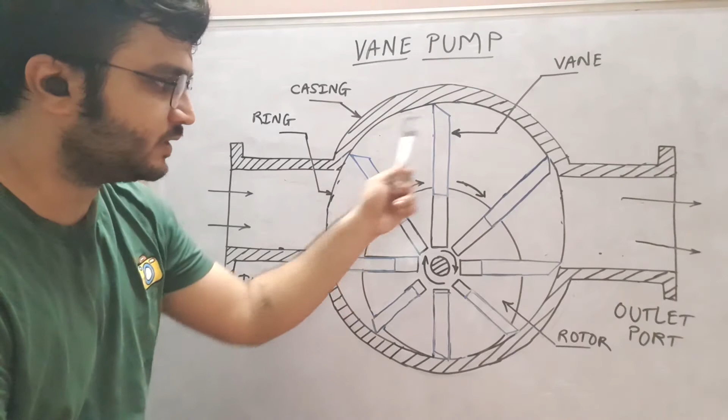A vane pump basically comprises a rotor mounted over a shaft coupled with the electric motor. This rotor carries a series of vanes in slots arranged radially around its periphery. These vanes make firm contact with a ring mounted inside the casing, and this ring matches exactly with the inner periphery of the casing.

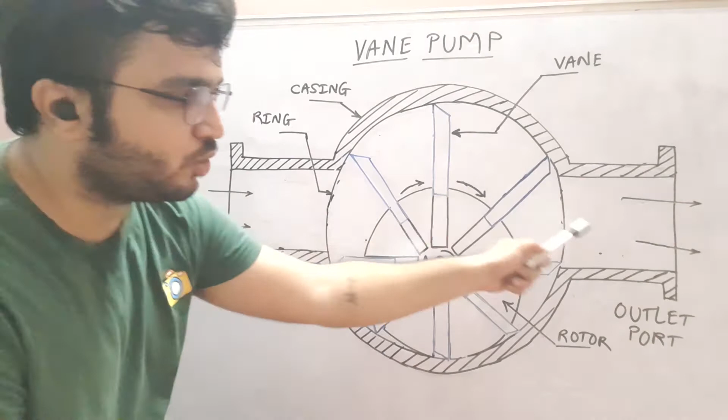This casing has an inlet port and an outlet port. From the inlet port, hydraulic oil enters during the suction stroke, and from the outlet port, high pressure hydraulic oil leaves the pump and is delivered to the required application area.

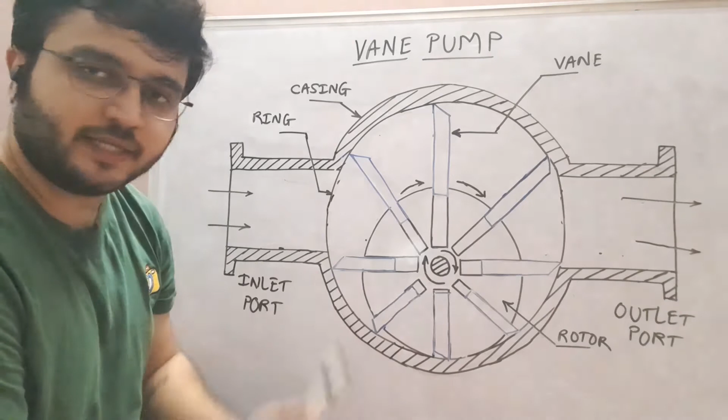Now let us see how this vane pump delivers high pressure hydraulic oil. As we know, the rotor is connected through some coupling with the electric motor. So when the electric motor runs, this rotor also rotates in a clockwise direction. Because of this rotation, centrifugal force acts on each vane, and these vanes come out of the slot and make firm contact with the ring.

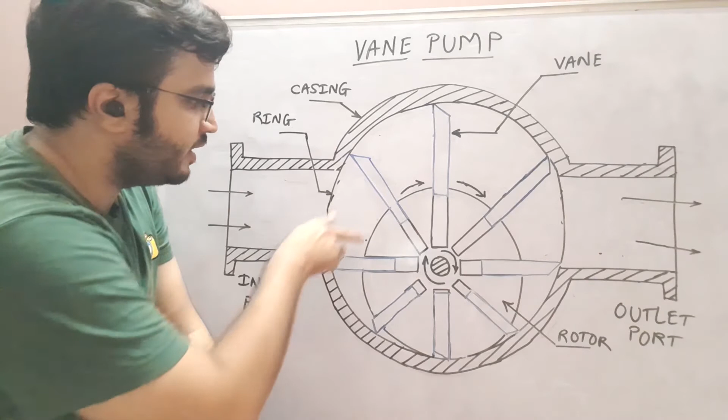So when this contact is made, suction is created near the inlet port, since the area, or volume, near the suction port is increasing, as we can see in the figure. Since the volume is increasing, vacuum is created, and hydraulic oil enters the pump through the inlet port and gets trapped between two vanes.

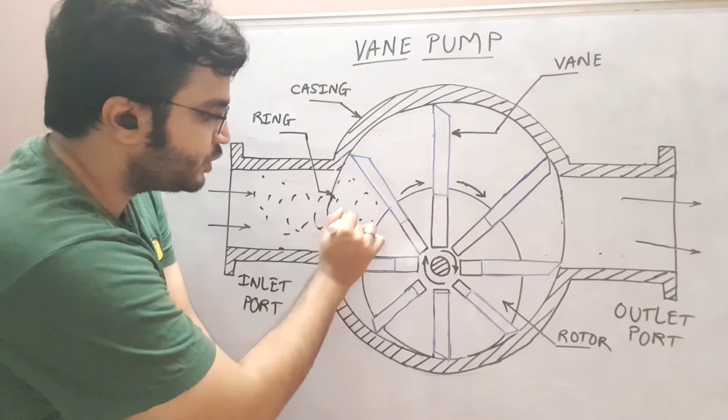Since these two vanes proceed, they carry the hydraulic oil along with them towards the outlet port, and we can see that near the outlet port the volume is decreasing. So since the volume decreases, the pressure ultimately increases.

So such high pressure hydraulic oil leaves the pump from the outlet port and is delivered to the required application area. This is how a vane pump delivers high pressure hydraulic oil.

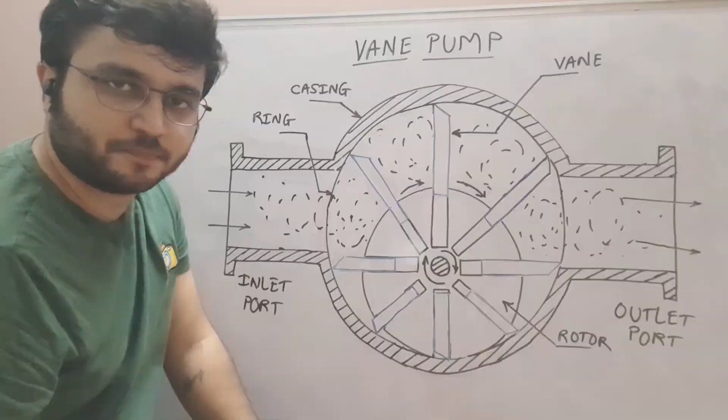I hope you have understood today's session. If you have any doubt regarding this topic, you can post it in the comment section.